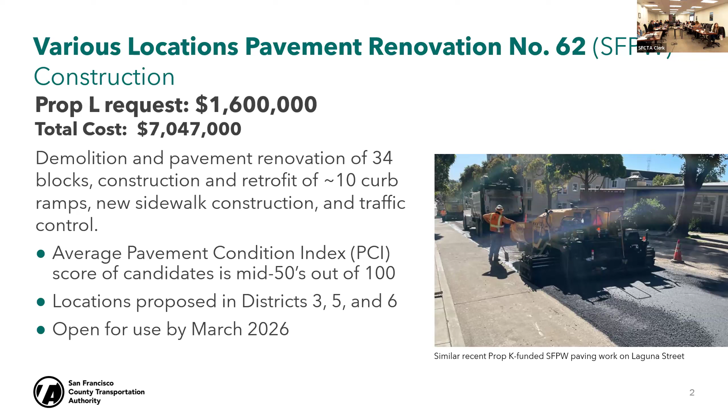Streets are selected based on the PCI score, along with the presence of transit and bicycle routes, street clearance, and geographic equity. The average PCI score for the locations in this project is in the mid-50s out of 100. The full list of locations candidates for this project can be found in your item materials, and the project is expected to be open for use by March 2026.

The second request tonight is a Prop AA request, Prop AA being our $10 annual vehicle registration fee. This request is also from Public Works for $1.2 million to improve lighting along Oakdale Avenue between 3rd and Phelps Streets. The requested funds will replace fixtures and arms on 16 existing streetlights and will install 9 new roadway scale streetlights along with electrical work related to those lights.

Improving lighting along Oakdale Avenue was the highest community priority in the Bayview Community-Based Transportation Plan, which was adopted in 2020. This project will make walking more inviting and safe along this important thoroughfare in the Bayview. In 2022, the TA programmed $1.65 million for the construction phase of this project to install 50 new lights.

But through the design phase, Public Works, which Prop AA also did fund the design phase of this, conducted photometric analyses and found it was actually able to retain the existing light poles with upgraded fixtures on those 16 and to add just 9 street lights to reduce the spacing and bring the lighting level up. So based on that analysis, Public Works concluded that additional lighting beyond the current proposed scope would cause areas to be overlit.

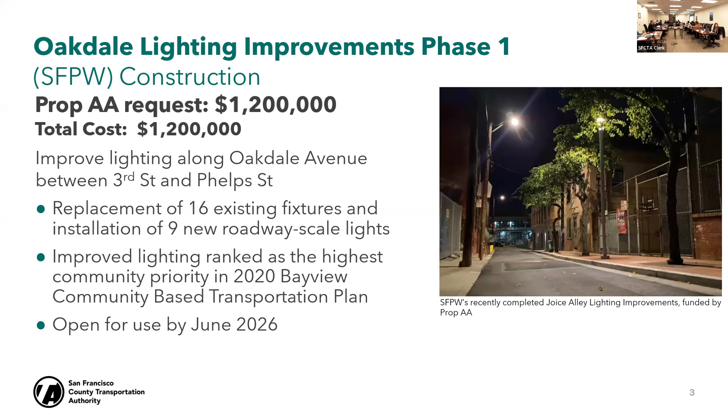And with that, I can take any questions. We also have project managers from Public Works available to answer questions as well. Thank you.

Great, thank you so much. Do any CAC members have any questions or comments on item 4? Member Ford?

Hi, just a sort of curiosity question. The repaving segments I noticed in the map are all quite short. Is there something specific that causes only a small section of the roadway to deteriorate faster than adjacent segments?

Thank you for the question, Member Ford. I will defer that to Edmund Lee, the project manager of that project. Hi, good evening, Edmund Lee, project manager for the street resurfacing program in Public Works. If I heard correctly, was the question what causes street deterioration in certain smaller, more localized areas sometimes, as opposed to consistently across a whole block? Is that what the question was? Yeah, like the segments are quite like sort of one block isolated segments.

Right, okay. So, so why just tiny segments one by one? Right, so there's a number of different factors, but a lot of what causes localized deterioration is with utility work. Over time, most utilities are underground, and when various utility companies go in, they could go in at any block, they can have a project that spans an entire corridor.

Good evening, everyone. Carl Holmes, Deputy Director, Capital Projects, here to present and request CAC approval for awarding the Hillcrest Improvement Project for construction contracts, as well as contract amendment for our designer, WMH. Next slide.

Most of you have seen this slide before. This is an overview of the work that we have on Yerba Buena Island. So just to orient you, the top right of the slide, if you go up and to the right, that is the Bay Bridge going towards Oakland, eastbound. At the bottom of the slide, between the green and the orange, that's the bridge going downward or westward into San Francisco. And up to the left is Treasure Island. So we have two islands: Treasure Island and Yerba Buena Island.

We opened the Southgate off-ramp, highlighted in yellow on the far right, in May of last year. And we started the West Side Bridges construction, shown in orange at the bottom left. That project is well underway. And what we're seeking approval for today is Hillcrest, shown in green between those two projects. Next slide.

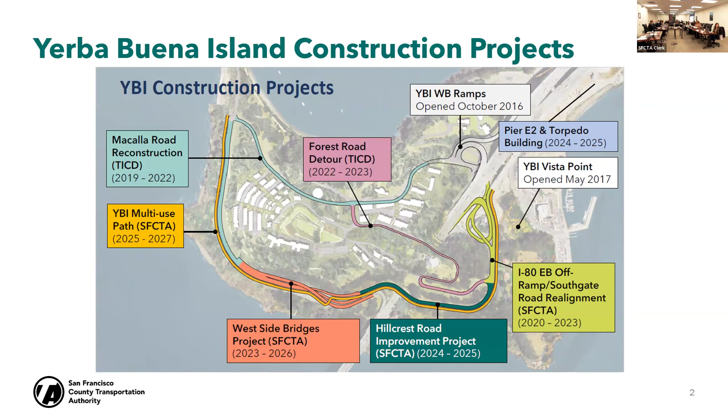This is a zoomed in view of the Hillcrest work. What is shown in red is the proposed vehicular access, and what's shown in green is the proposed class 2 bicycle lane.

For vehicle access, going from left to right on the bottom left of the slide and traversing up, you'll see a vehicle can make a choice. If they go left, they can continue around the island by going underneath the Bay Bridge. If they go right, in the upper right of the exhibit, they could go onto the Bay Bridge towards Oakland. We also have the bicycle access connection in green, where bicyclists can make a similar choice: continue eastbound toward Oakland on the bridge's bicycle access, or go underneath the bridge and continue around the island.

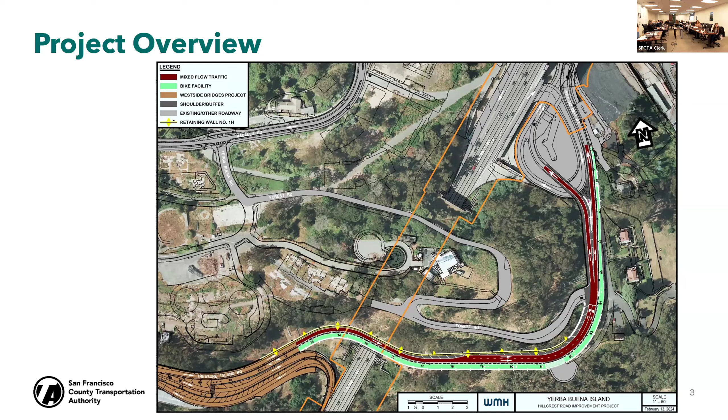We came to you in September to present a proposed act of good stewardship, where we discussed the idea of basically installing a retaining wall one time. What's shown on the upper right of this slide is what we call the previous baseline scope for Hillcrest, and you can see a retaining wall on the left of that upper exhibit. What you may or may not be able to see is, to the left of that wall, there's a tiny slope showing the hillside.

So what we presented to you in September was the idea of trying to add in additional work to make way for the future multi-use path, which is a separate project. We wanted to cut into the hillside one time, install a taller wall, and not have double work and inconvenience travelers, residents, and visitors while we have this section of roadway closed. We're happy to say we've been able to receive bids with that scope in mind, but ultimately for this project, we would end up with a Class 2 bike lane for this contract.

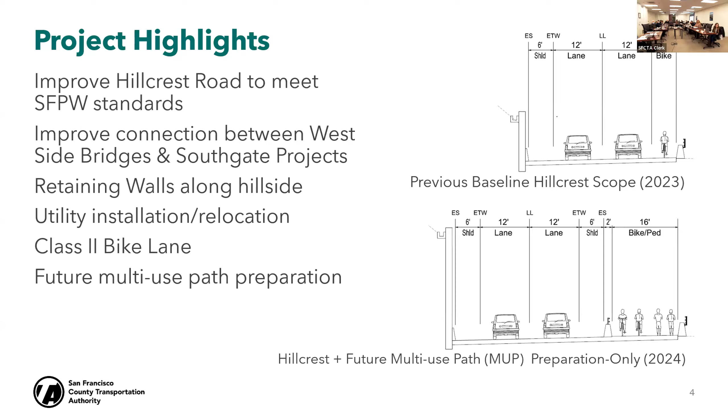Next slide. This is intended to show the challenge of the steepness of the topography. You can see on the upper left the photo of the steep slopes. You can also see on the upper right the challenge of working over the Bay Bridge and making sure that we are protecting the area for current traffic loads. We also have to maintain a certain amount of weight restrictions over the portal just to make sure the area remains secure.

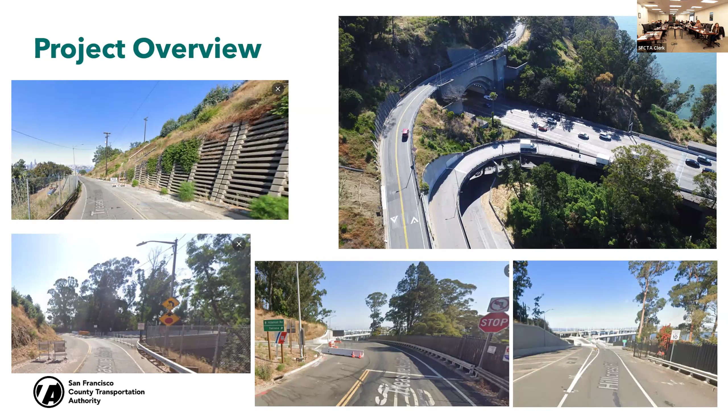What we presented to you back in September was an estimated value of that additional work to be around $8 million, and CTC approved an allocation for $2.6 million, so it's a portion of it. We also have other sources of funds, Prop-K fund exchanges that Anna's team brought to you as well, and to the board for approval. So we have a plan, which you'll see in an upcoming slide.

Next slide. Now for the procurement, how we got to where we are today. We had an engineer's estimate of $21.1 million. We advertised this bid in January, and we received bids on March 14th.

We also incorporated what we're calling an aspirational goal for DBE and SBE. Why is it aspirational? Because this is a non-federally funded project, so we didn't have a mechanism to require that participation, but we still, as good stewards, wanted to ask for that aspirational goal. It's not a requirement for bid analysis and award, but by saying nothing, we would likely get nothing. So we still put the request in.

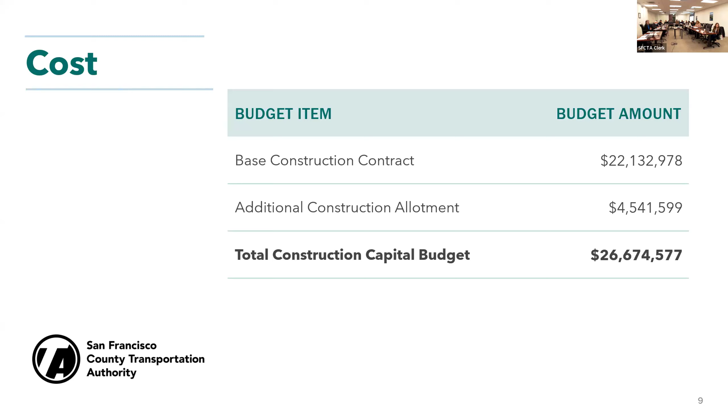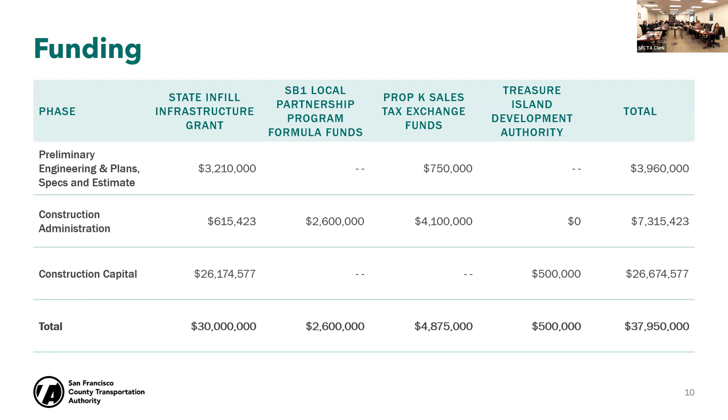So that was the construction contract. Now we get into the designer and requesting approval for an amendment of their contract to support us during construction with their design efforts. What does that include? It includes responding to questions that the contractor will have, possibly any redesign of elements of the contract if we find unforeseen conditions or if there are any other changes that need to be made, and then also at the end of construction, providing as-built record drawings for good record keeping sake.

We're requesting approval to amend their contract in the amount of $750,000 and also extending the duration of their contract through December of 2027. They have been a great partner in designing this project, and they've also exceeded the DBE goals significantly. We're pleased to present this as well tonight.

So again, to summarize, the requested actions are to seek approval to award the construction contract to Thompson Builders in the amount of $22.1 million, to authorize the additional construction allotment of $4.5 million, and then to amend the WMH designer contract agreement in the amount of $750,000.

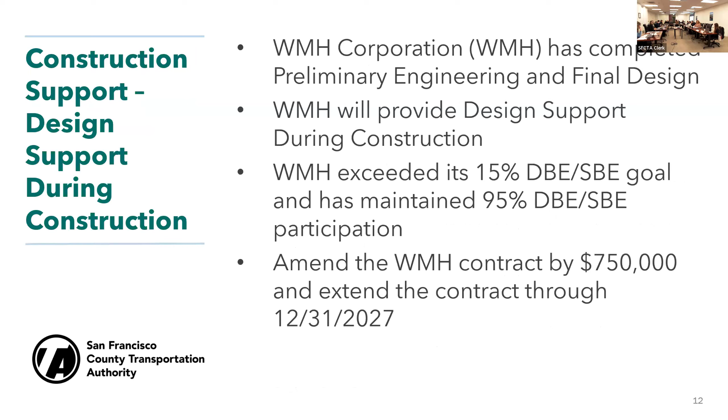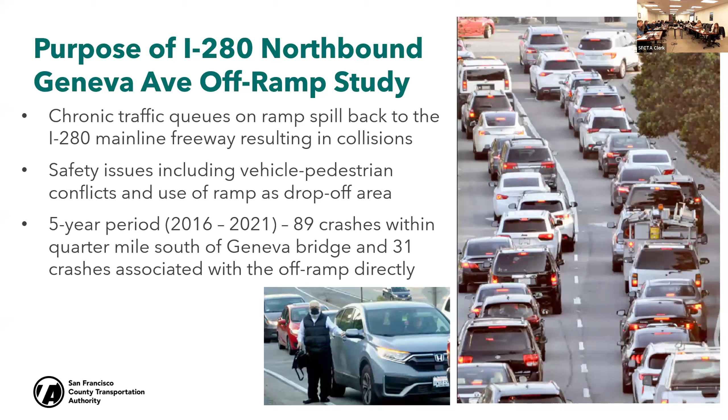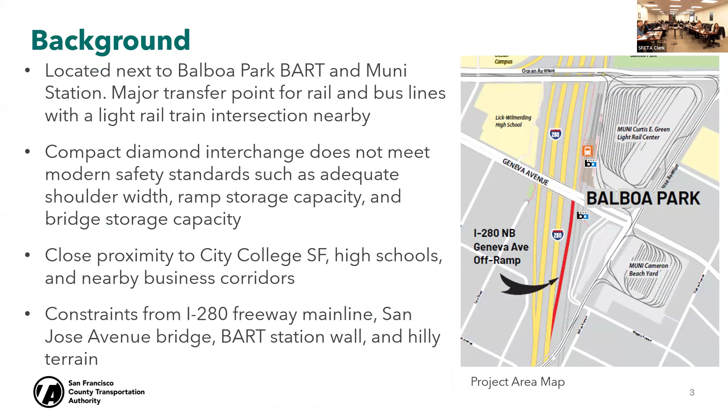I'm going to go on to the next slide. This is just a map of the area showing the location, the BART and Muni Station, and the geography of this area. Next slide.

I want to point out number three. Number three is where the westbound Geneva Avenue traffic makes a left turn to the I-280 southbound on-ramp, shown in the bottom photo. That has led previously to a pedestrian crossing conflict. What happened was the left turn pocket lane would get the lead left turn green light, and the cars would proceed and just keep moving. So even though the pedestrians eventually get the green light, the cars still keep going, and that's why you get this pedestrian conflict at that time.

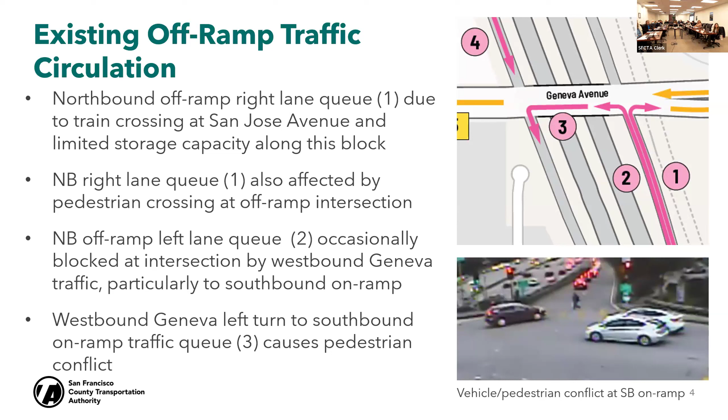I'm going to go on to the next slide. Now, out of the Geneva Avenue safety study, we developed several recommendations.

The near-term recommendation is to implement a new signal and phasing change. This is for both ramp intersections, the I-280 northbound off-ramp and the I-280 southbound off-ramp, which is also the southbound on-ramp. Both intersections are controlled, owned, and operated by Caltrans, and we were able to work closely with Caltrans and SFMTA, who operate the signals a block away from this intersection. They were both very, very helpful.

We managed to develop those signal changes, and with Caltrans and MTA's help, we were also able to implement those changes as part of the study, which was not in the original scope.

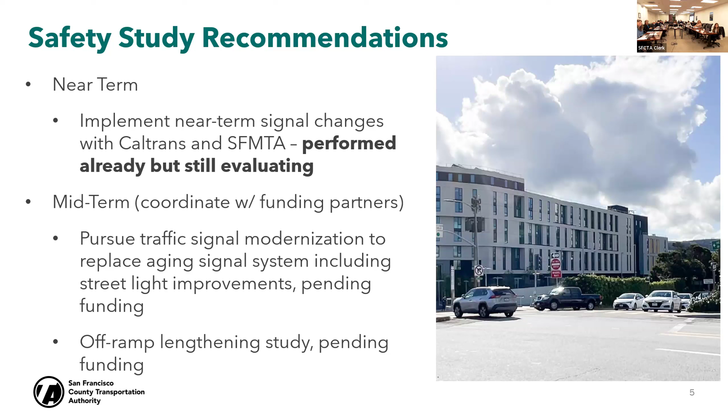The midterm recommendations from this report include pursuing traffic signal modernization, to replace those signals at both ramp intersections. That does require additional funding, and we're also considering another off-ramp lengthening study, to study the off-ramp going all the way to the mainline freeway and a little bit beyond.

Okay, next slide. This is just the near-term signal traffic modifications. Those three diagrams are just an illustration of what we were able to implement. I'll point out the middle diagram B, where you can tell that we fixed that westbound Geneva left turn to the southbound on-ramp. This is the new signal configuration that was implemented with Caltrans and SFMTA.

We were also able to change that left turn from a leading left turn to a lagging left turn. So instead of the left turn traffic to the southbound on-ramp keeping moving nonstop and preventing pedestrians from crossing the crosswalk, we shifted to a lagging left turn, meaning they get the green light signal after the eastbound traffic is able to proceed and after pedestrians are able to cross the crosswalk, so there is higher visibility for that. Okay, I'll go on to the next slide.

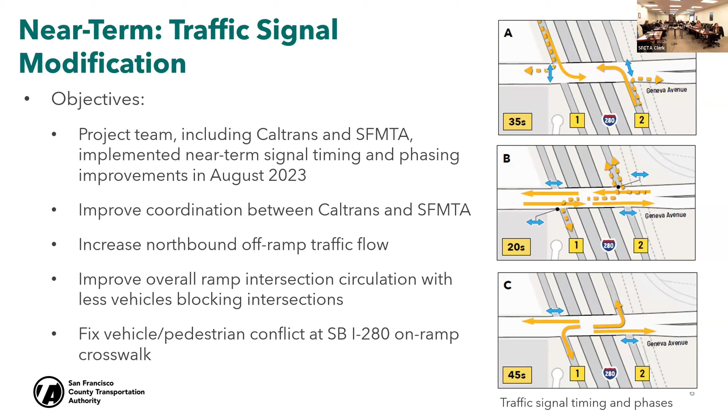As I mentioned earlier, we were able to fix the pedestrian safety issue at the I-280 southbound on-ramp. This is an overall improvement that we implemented. I'll go on to the next slide.

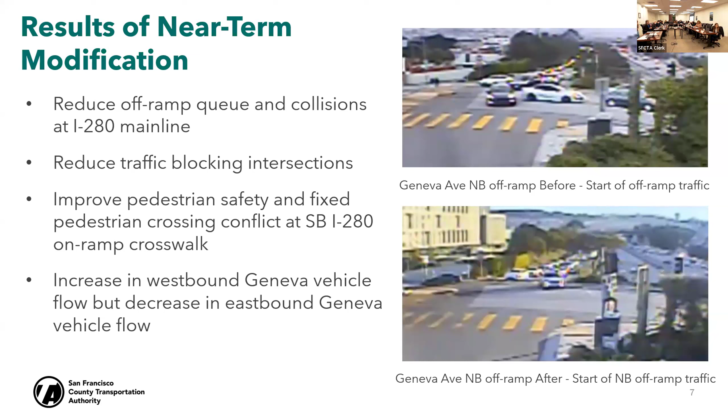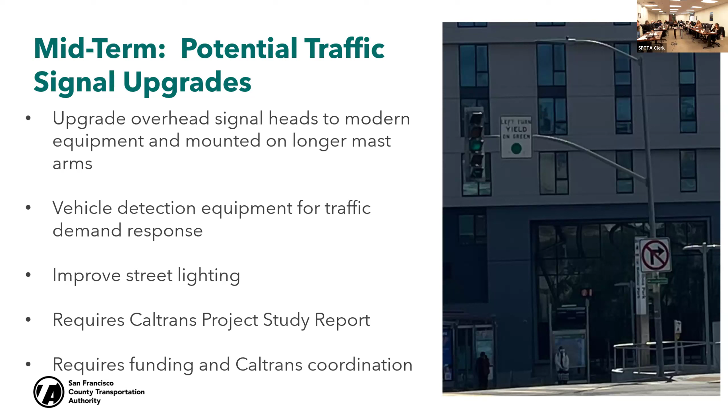From our midterm recommendations, we are suggesting potential signal upgrades, moving forward with upgrading the overhead signals and incorporating longer mast arms, for both ramp intersections. This will improve visibility, and we're hoping to use more updated signals with newer features such as vehicle detection equipment. The existing signals are actually quite old, more than half a century old. This does require additional coordination with Caltrans, including a Caltrans approval process, project study reports, and additional funding.

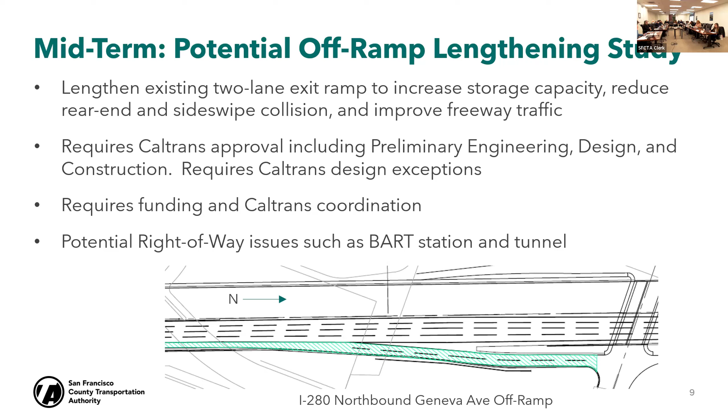For next steps, we're looking at continuing coordination with Caltrans and SFMTA, to continue evaluating that ramp intersection after our signal timing changes, and to pursue the signal upgrade with Caltrans. This will require additional funding, which may come from different sources, including the State Highway Operation and Protection Program, SHOPP, Prop L, SB1, and the Local Partnership Program. We also recommend pursuing funding options for the midterm study to lengthen the off-ramp. With that, I'd like to conclude my presentation and take questions.

I also want to let everybody know that we have SFMTA representative Tony Young with us today to also answer questions. Tony was helping out with this project and is a part of it.

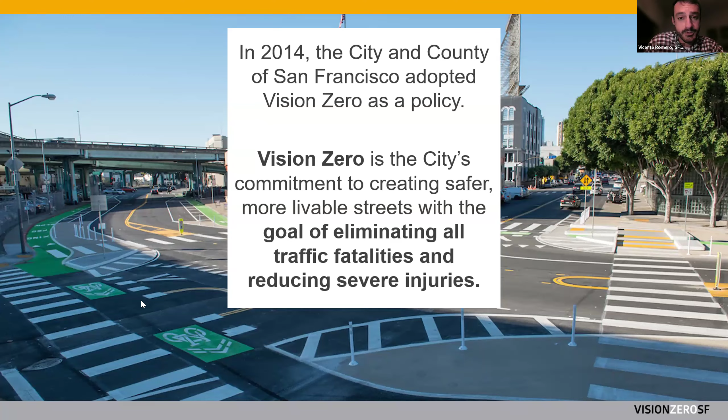Related to these 10 years of Vision Zero, starting in spring we'll begin an outreach process to the Vision Zero community to define the next phase of street safety in San Francisco. This will include a mix of internal and external listening sessions, interviews, and surveys. We'll then collect all this feedback and share the results.

Meanwhile, we already have commitments that will carry us past 2024, as listed on this slide. We will install 33 speed safety cameras at 33 locations. We will keep working on Quick Build pedestrian and bicyclist improvements on the remaining 50 miles of the high injury network. We are expanding no turn on red in parts of the city with high concentration of pedestrian activity, notably downtown, South of Market, and North of Market.

We'll continue implementing daylighting, including enforcing AB 413, and we will implement a series of comprehensive safety treatments in the Western Addition and the Tenderloin as a result of the $25 million we received from the Safe Streets and Roads for All grant.

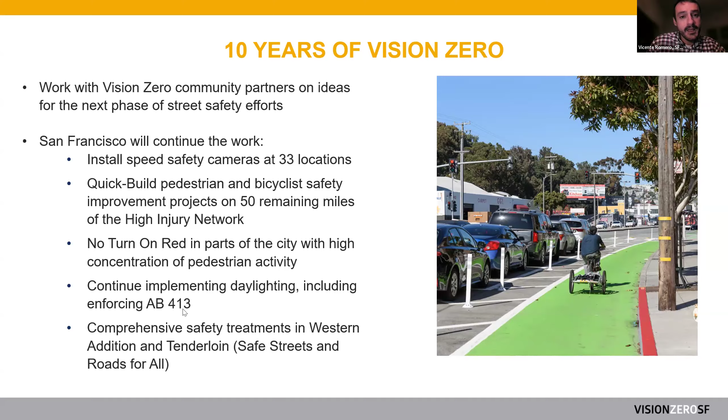2023 saw a 33% decrease in overall traffic fatalities from 2022, a year that saw the most traffic fatalities on our streets since 2007. Compared to 2022, pedestrians experienced a 10% decrease in fatalities, and there was a 55% decrease in the number of people killed in motor vehicles.

These next couple of slides cover high-level takeaways on the 2023 context. If you want more details, please check the 2023 end-of-year fatality report and the severe injury trends report, which will be released by the Department of Public Health in the coming weeks.

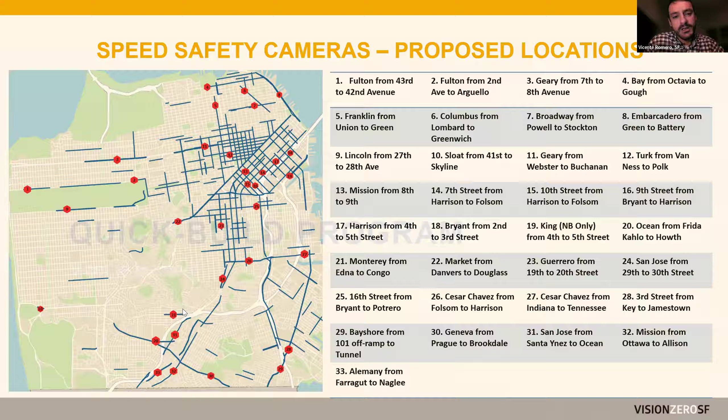Finally, I'm going to give another update on the Quick Build program, also on behalf of Jennifer Wong, the SFMTA's Quick Build program manager, who couldn't attend.

So as you know, Quick Builds are a key feature in the 2021 Vision Zero Action Strategy. This program was formalized back in 2019 to create brand recognition for the lower cost, but it's still a substantial body of work we're doing in streetscape. This program has 2 components: the Quick Build corridors, of which we've already done 33, until December of 2023, and then the Quick Build toolkit or intersection improvements that I'll talk about later.

Here are a couple of corridors I'd like to highlight that have been recently implemented. Just in time for the new baseball season, the Third Street Quick Build project was approved this month and immediately went into construction. The new 2-way protected bikeway connection is a new route to get to the ballpark and onto Townsend Street. It's worth mentioning that it's the first sidewalk level bikeway in San Francisco. There is actually a press event to celebrate this coming Friday at 11 a.m. at Willie Mays Plaza at Oracle Park, and all are invited to join.

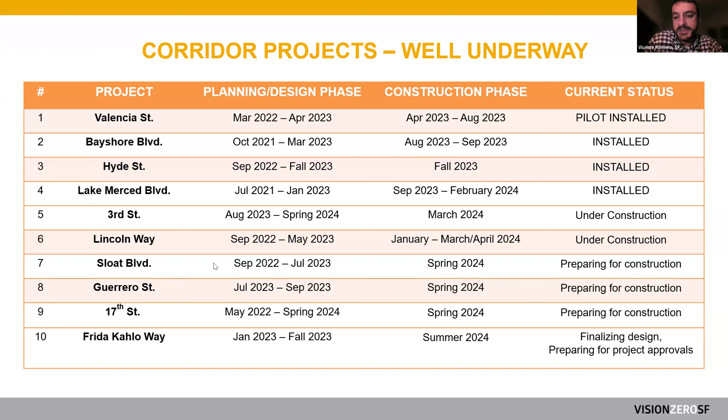There are many more corridor projects well underway. Lincoln is another project currently under construction, about to finish. A few more are preparing for construction, including Sloat, Guerrero, and the recently approved 17th Street east of Potrero. These 7 you can see here are still in the works, though a couple are dependent on public works repaving schedule, like Clarendon and Larkin. Roughly speaking, we're working at a pace of about 1 project per month.

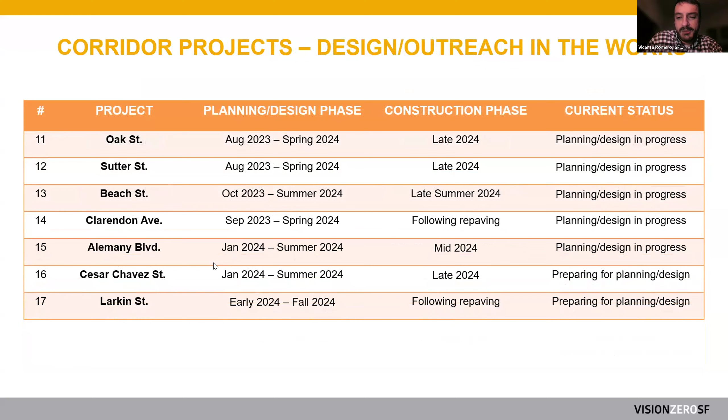Finally, the other component of the Quick Build program is the Quick Build Toolkit, or intersection improvements. Upon completion of this project, every remaining intersection in the high injury network will receive core treatments, including continental crosswalks, daylighting, advanced limit lines, pedestrian head starts, and longer walk times. We will also run additional screening to identify intersections needing signal head lens upgrades, painted safety zones, and turn calming.

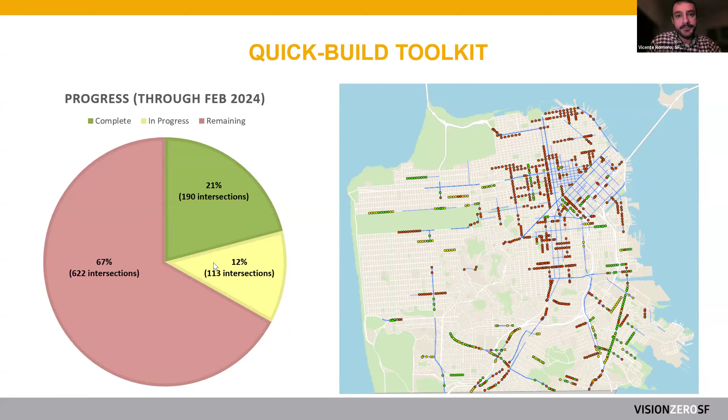And with that, that's the end of my presentation.

Yes, thank you, Chair. I have several questions, and I realize it's quite late, so I will do my best to be as concise as possible. Let me first share some comments and feedback, and then I will ask 2 questions.

So, comments. I have to admit that I am frustrated with the fact that we didn't just say at the top that we did not achieve our Vision Zero goals. I appreciate the substance of the material, and I want to thank staff for the thoroughness and commitment to these initiatives. But we actually had a goal for Vision Zero, which was to achieve 0 traffic fatalities by 2024. We did not achieve that. I believe that it is a miss that this is not stated in the presentation.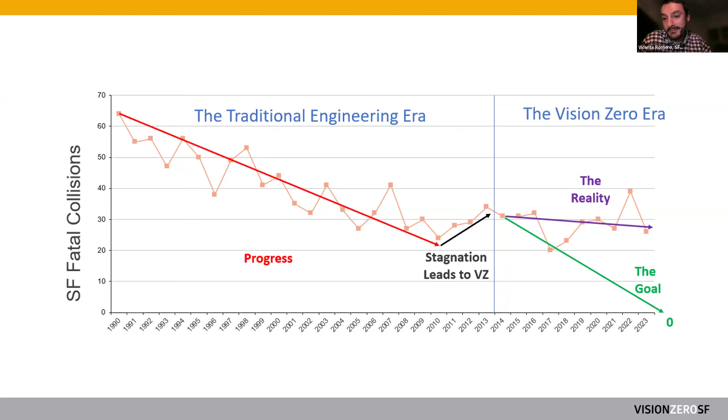But as I was mentioning before, three of the lowest years for fatalities happened within these 10 years of Vision Zero. The last one, as you can see in the graph, was in 2023 -- that's the lowest we had. 2017 had 20 fatalities, and then those three other years I mentioned. This graph, I'm presenting it here for the first time, but it's going to be in that 10-year retrospective. Again, the facts show that fatalities are trending down, not as fast as we'd like, but they are trending down. The difference was 0.7 fatalities from what I shared at the beginning.

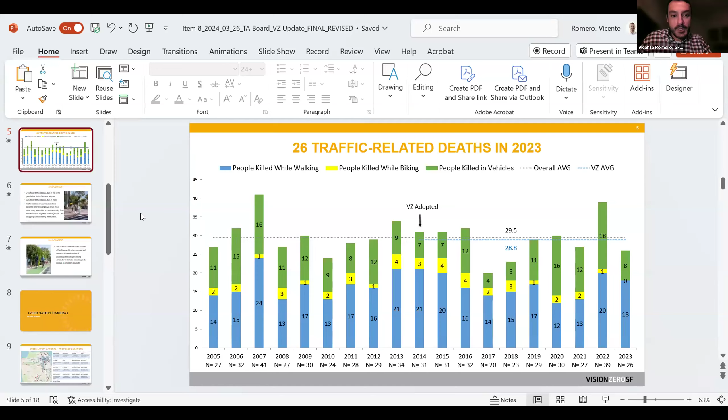From where is it? Oh my God. Here, from an average of 29.5 to 28.8. It's very low, but that is where that statement is originated, using the combination of these two different graphs.

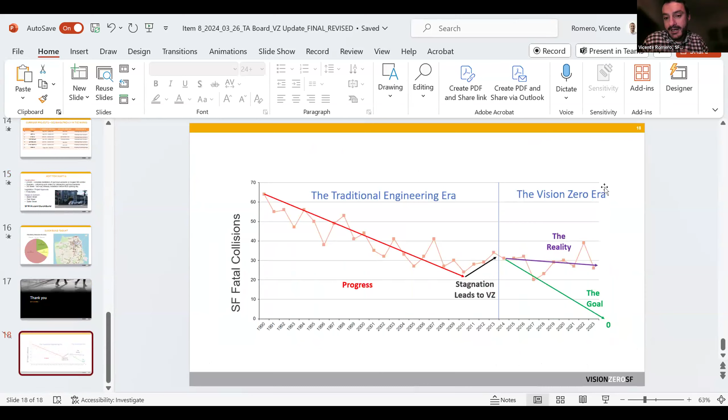But yeah, we'll share more information in that 10-year retrospective that is going to be released in April. Great, thank you, that's actually really helpful. It seems like we have stopped that really steep increase, but we're not necessarily bringing things down appreciably yet.

I have some feedback just for the Vision Zero program overall, acknowledging that you two might not necessarily be able to implement it, but I would maybe formally request that Director Tumlin or the program coordinator for the Vision Zero program come give a presentation to us at some point so that we may ask them directly about this. But I am also sort of disappointed by the positive framing and dropping the 2024 language from the presentation. I am very supportive of the quick builds planned on the high injury network and the no turn on red implementations and daylighting. But I think what I'm seeing from these numbers is that the spot fixes are not getting us to Vision Zero fast enough, if at all.

Maybe it has stopped the extreme increase. And so just to build on some themes from the earlier discussion on the I-280 study, I would encourage SFCTA and the Vision Zero program to think bigger. One thing that stands out to me is that since adopting Vision Zero, my understanding is that automobile mode share has actually increased and transit mode share has decreased, which is probably directly related to the fact that we haven't moved the needle so much on this.